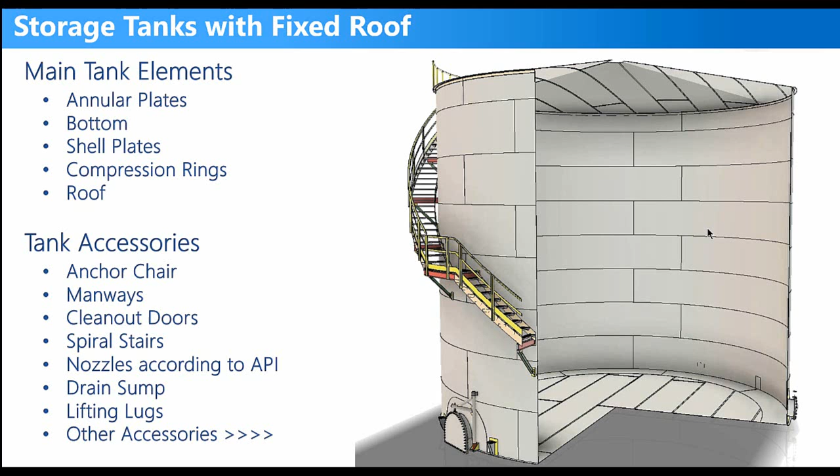Let's at the beginning discuss the elements that we have the ability to add in this model. Let us define it in two types. The first type is the main elements like annular plates, bottom plates, shell plates, compression ring and roof. Those are the main elements of the storage tank. The others shall be the accessories like the anchor chair, manways, clean out doors, spiral stairs, and we will discuss how we can add those elements in our model.

At the beginning, let's define the types of annular plates. We have three different types. The first type is annular plate with equal pieces. In this type, you have the ability to define the number of annular plates, and all of them will be identical - the same arc length, the same thickness, the same width, all dimensions shall be the same.

The second one is the annular plate from different pieces. Here you have the ability to define the arc length for each annular plate, but the thickness will be the same for all. The third type is annular plate from different pieces and thicknesses. In this type, you have the ability to make both the arc length and the thickness differ from one to another. So the main difference between the three types is the controlling of the arc length parameter and the thickness parameter.

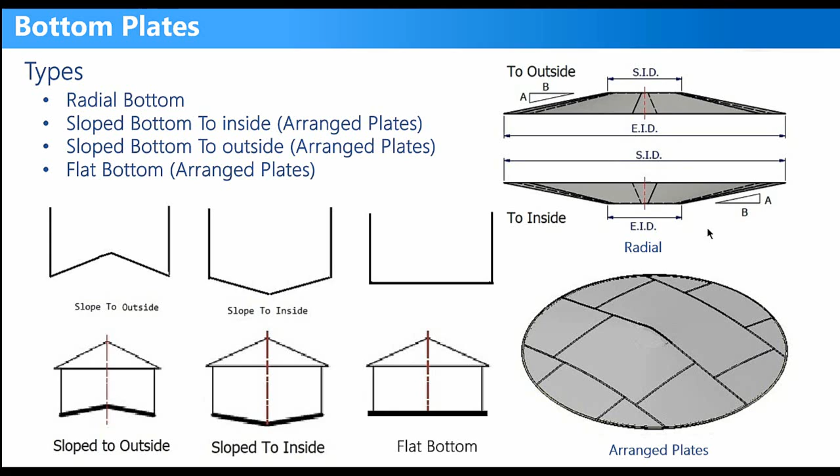The second main element is the bottom plate. We have in SEG software four different types of bottom plates. The first type is radial bottom - you can create radial plates to create the bottom plates. The second type is sloped bottom with arranged plates to inside or to outside. That is the third type. The last type is flat bottom with arranged plates, and for the last three types, you can use a new tool in SEG software to make the arrangement of plates of the bottom.

The shell plates - in shell plates we have in SEG software more than 10 different types, but actually we will use two types only in storage tanks. The first type is shell from different pieces, where the user will define the length of each plate. But in the beginning, SEG software will make all of them equal and will give you the ability to change the required piece length as user defined.

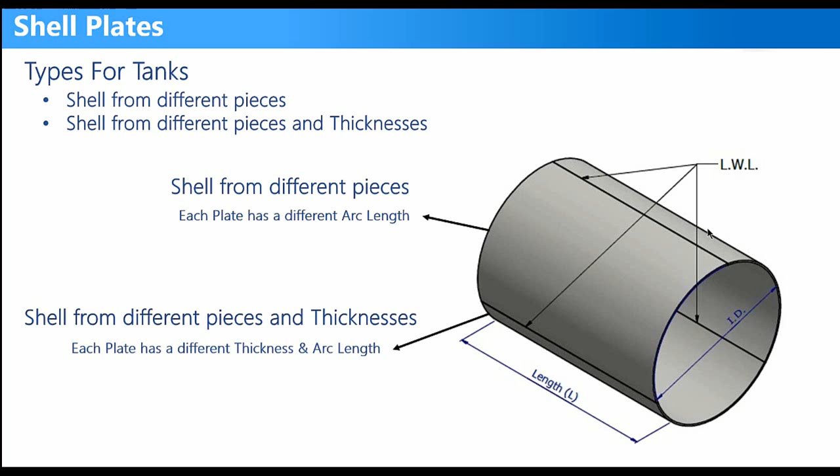The second type is shell from different pieces and thicknesses. In this option, the customer will have the ability to define the thickness of each plate and the same for the arc length for each plate on the shell course. We will discuss that in detail in our demo.

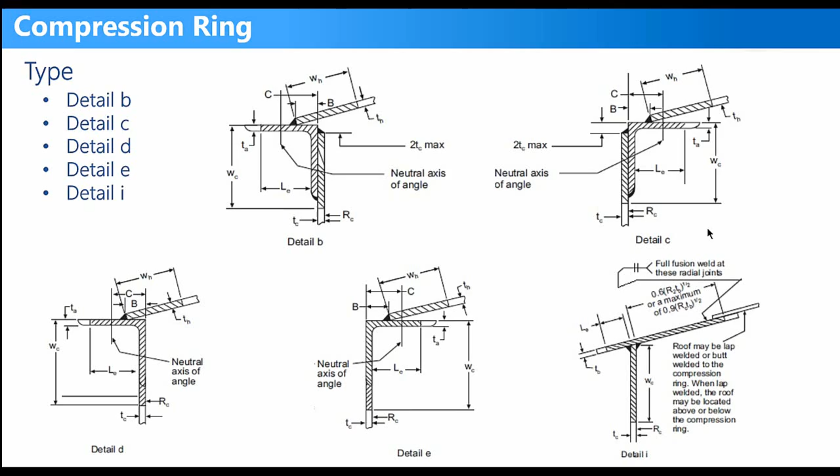Roof plates - we have three different types of roofs, all of them fixed. The first type is radial roof, where the plates will be radial to the center of the tank. The second type is arranged roof from plates, like the bottom. The third type is dome roof, and you can make this roof as a dome roof.

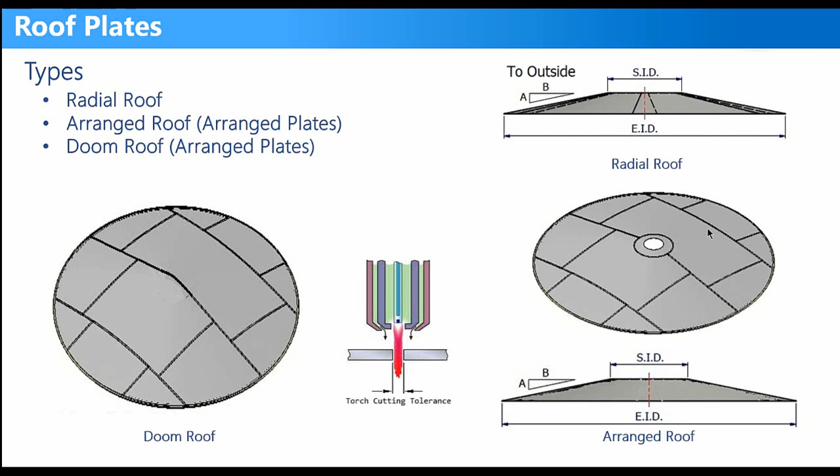Now we will discuss some accessories or attachments to the tank, like the anchor chair. In the anchor chair you can add a wear plate to the anchor chair, and you have the ability to remove it if you don't want it, or add it. Regarding the required number of anchor chairs, you can define the quantity of the anchor chairs to make them as a better arrangement.

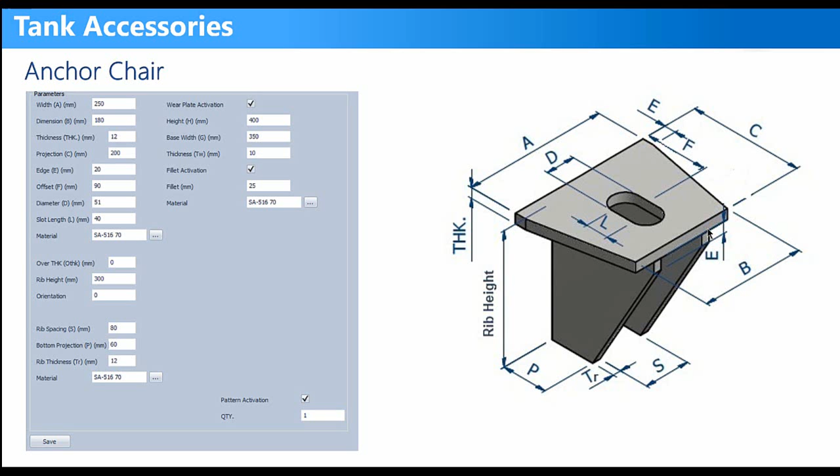And if you want to make them separate, defined differently from the others—for example, one has a wear plate, or one has a different shell thickness—you have the ability to define them separately, and you will not use the pattern option.

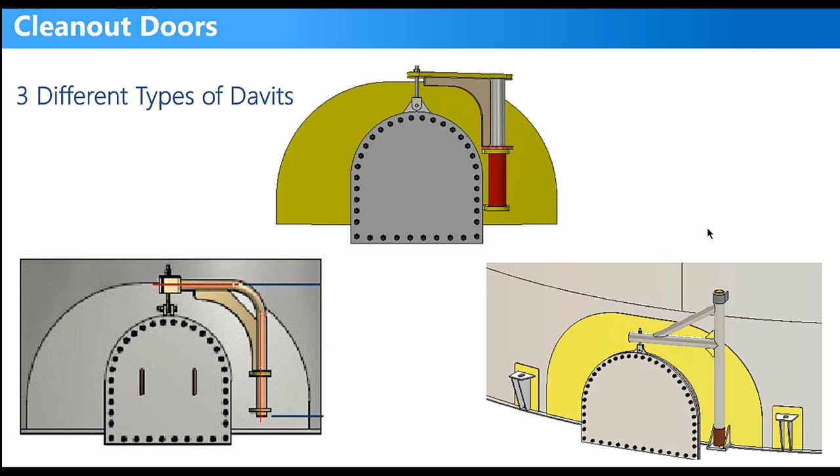Here for the spiral stairs, you have the ability to add a spiral stair to your storage tank, and you can add any number of levels of spiral stairs to your model.

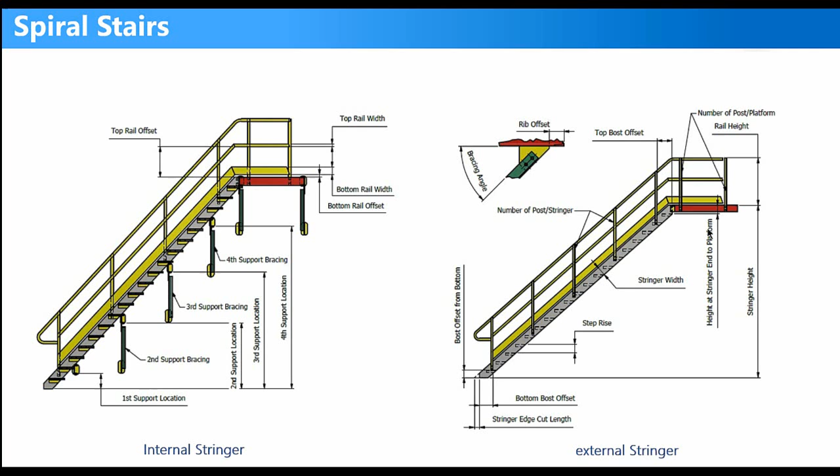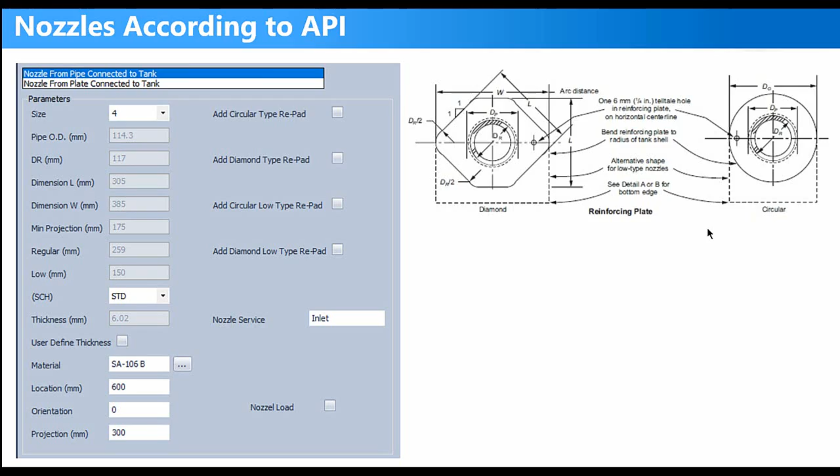For nozzles, you have 2 different types: API nozzles, according to the API requirements, and nozzles according to ASME requirements. You can change the shape or configuration of the re-pad according to API requirements—whether it's a circular or diamond re-pad, circular low type or diamond low type—so you have the ability to change this. In SEG software, there's a tool for plate arrangement.

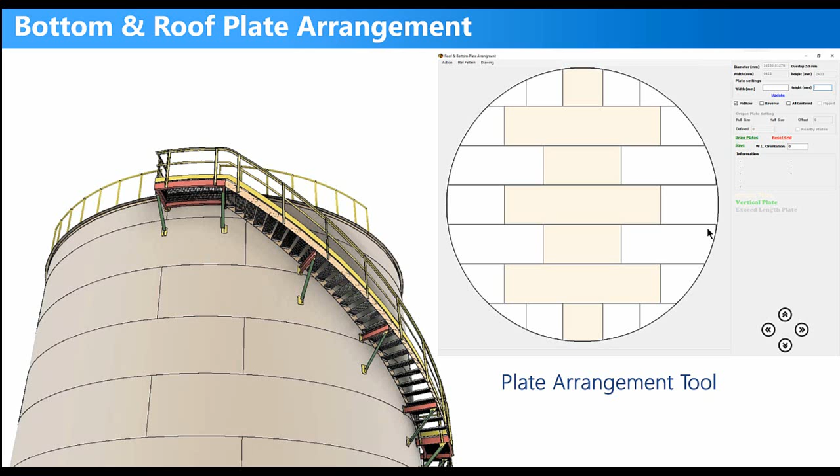We will discuss it in detail in our model during our presentation, inshallah, and show the options available in this module. Finally, we will make some nesting studies during our presentation.

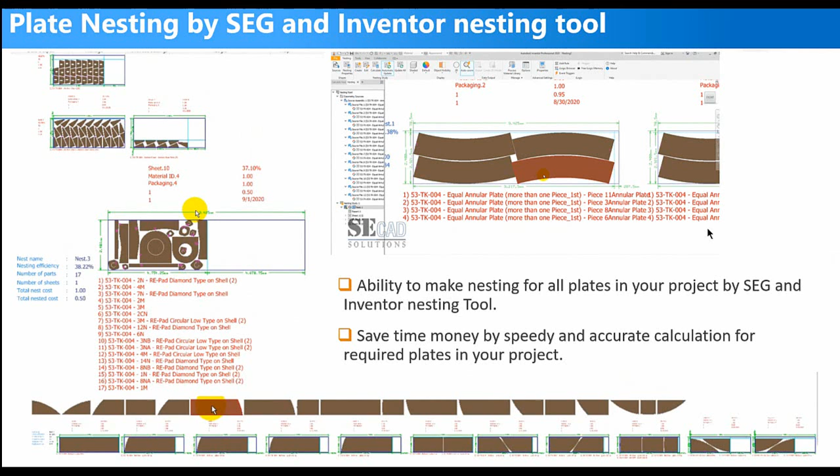Okay, now let's start our model. From here we will open SEG software. After opening SEG software, from the new tab we will define our project name.

And select the location on the hard drive, and from here we will select tank module and click finish. From the tree here we will select the equipment and rename it TT-100.

After selecting it again, from setting we will select equipment setting, and you can see that the position is changed automatically to be vertical and bottom to top. That depends on the type of the project—it's a storage tank, so those values shall be changed automatically.

Here we will define the delivered plate dimensions, and those shall be used in the calculation of the plate arrangement for roof, bottom, and shell plates.

So let's define the required or delivered plate dimensions, and from here the surface and the serial number, and you can define the material from here.

Okay, from app setting we will make a preview for the parent and the child, and the sort numbering to make it sort numbering, and click save.

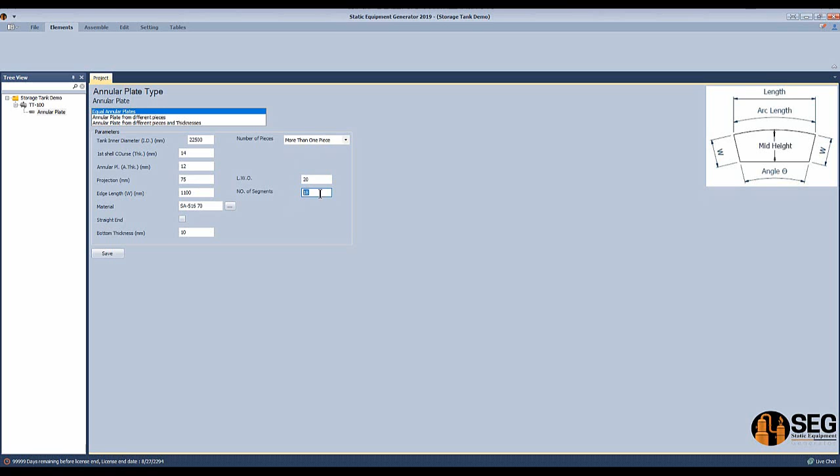And the projection 75, and the edge, let's make it 1100, and here the bottom thickness, let's make it 10 millimeters, and the longitudinal building line orientation, let's make it 20, and the number of required annular plates 18, and click save.

Now we will click assembly to start the assembly. Let's come back to Autodesk Inventor.

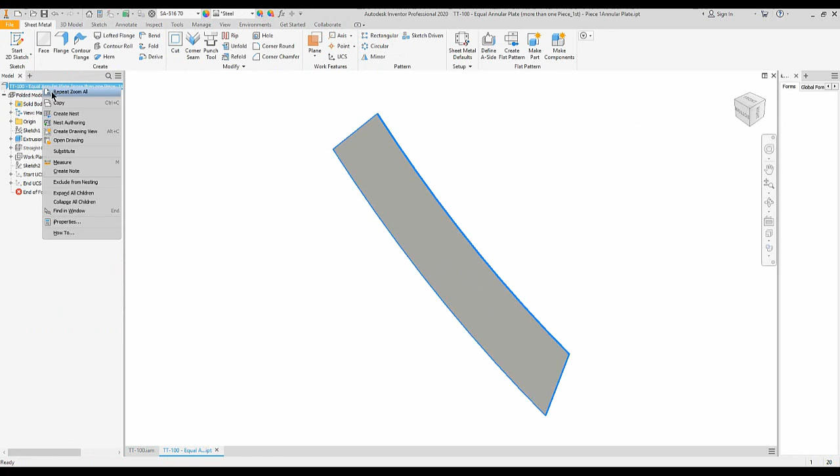Okay, now we will make a nesting for those plates. Let's select one of them because they are equal, and let's make a nesting for it. So we will create a nesting study, and from here we will select standard nesting.

Detecting the material and thickness of this item. After importing, we will click OK, and from process here, if we select this one, you have the ability to define the length and width of the plate to be delivered.

And from nesting, we will create a new nesting here, and from here we will define the required number of this plate and update this nesting again.

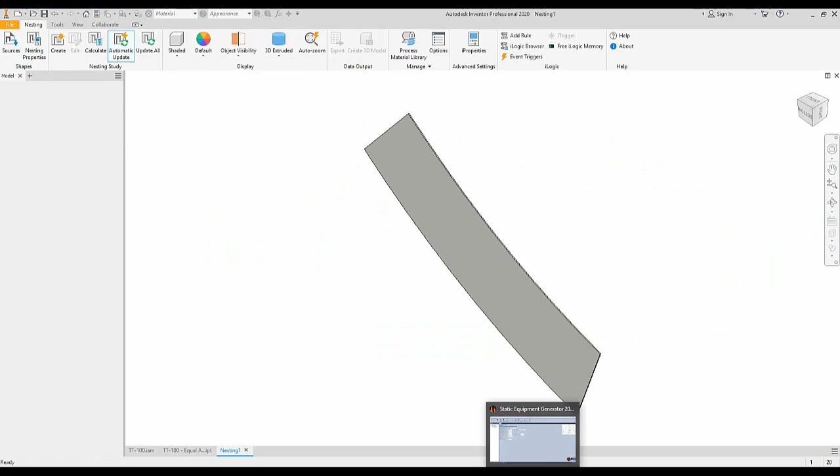Let's make a small modification and check what will happen, what will be changed on the model. Let's make the length 1 meter, and the required number 16, and click save, and let's click start and check the model again.

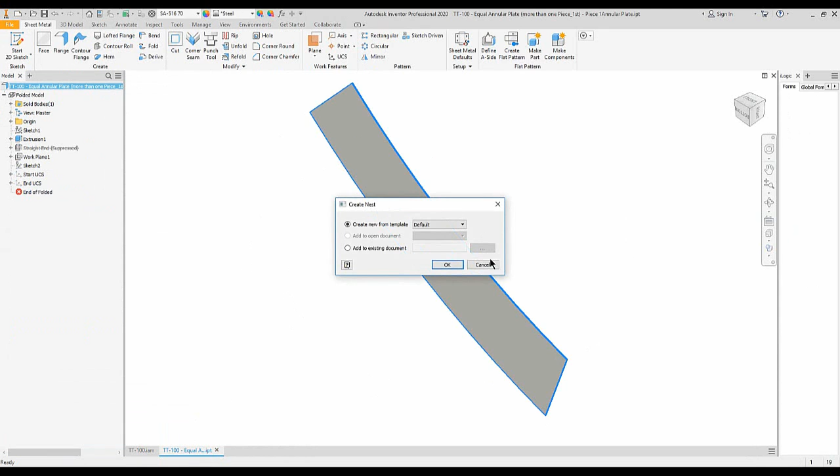Okay, here we will make a nesting for this plate and repeat this process again. Click yes, and after the extracting process, we will click OK. From here you can check the dimensions of the nesting plates, and let's create a new nesting. From nesting, right here we will define the required number, which is 16, and click OK.

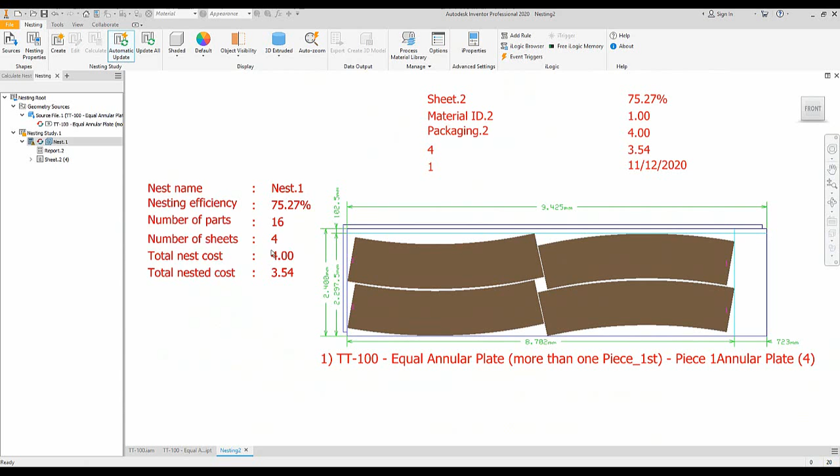Right here you can figure that we will need 4 sheets only after this modification, and the efficiency is increased to 75%.

Okay, now let's add the bottom plates. Now we will come back here and add the bottom plates, and from elements we will select the equipment, and from here we will select a arranged sloped bottom. Click enter, and from here we will select the type of the bottom, sloped to inside or outside.

Okay, and from here we will define the bottom thickness, the overlap, and the inside diameter of the tank, or the outside diameter of the bottom, the material of the bottom, the slope, and the cut tolerance. And from here we will click save and open this model.

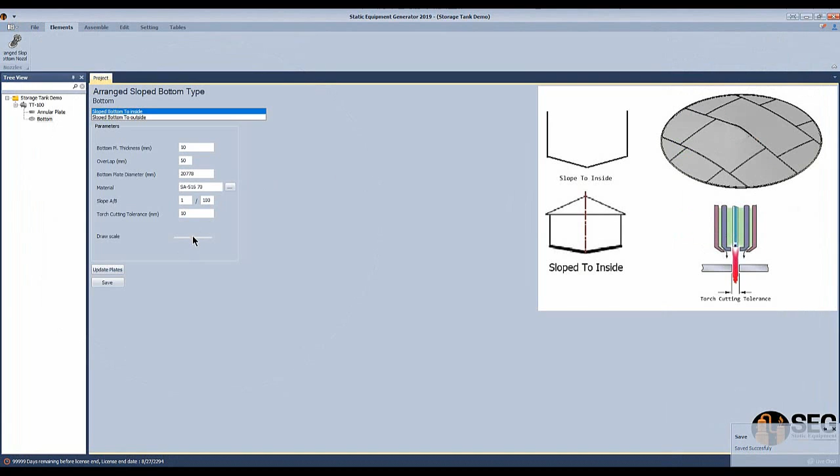This slider is controlling the size of this circle right here. So if you make it like this, it will be small. If you make it like this, for example, and update, it will be like that.

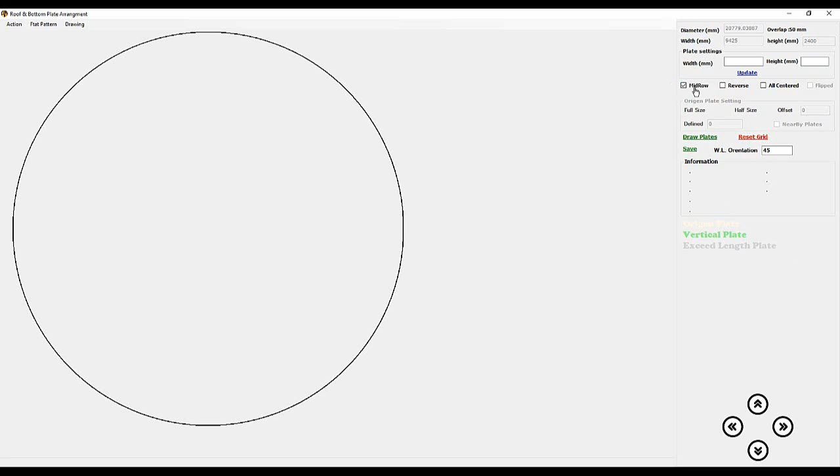Now we will make some studies, and we have some options to make the plate arrangement. So from here, let's select mid row and click draw plates, and by selecting this checkbox you have the ability to add a mid row right here.

But if you take a look, we have small pieces right here and we don't need it. So let's check another option, which is make all of them centered, and click draw, and you can figure that this is better than the other one.

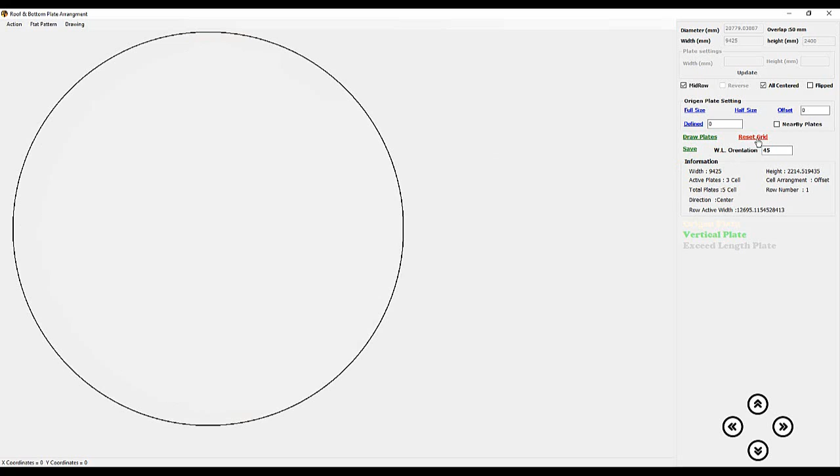And let's select the reset grid and make a reverse and select draw, and you can figure that we have small pieces right here. So let's make it mid row and all centered, and click draw plates, and this option is better.

Now let's change the orientation of the welding lines here and click save. Now we will go to the assembly and click start assembly.

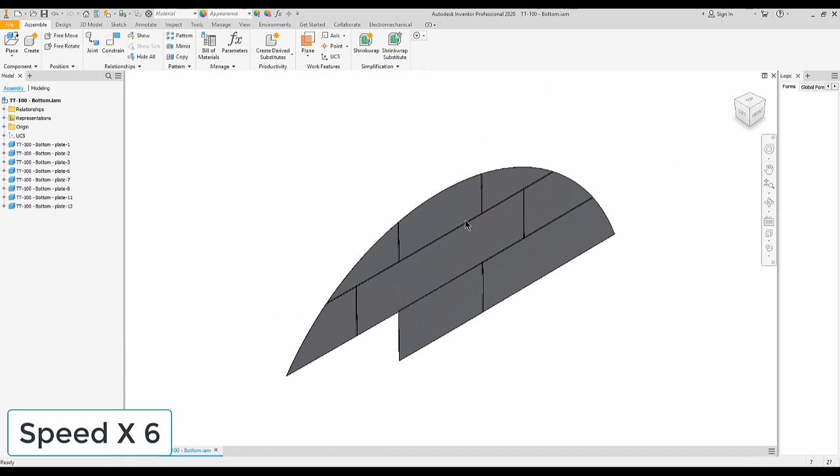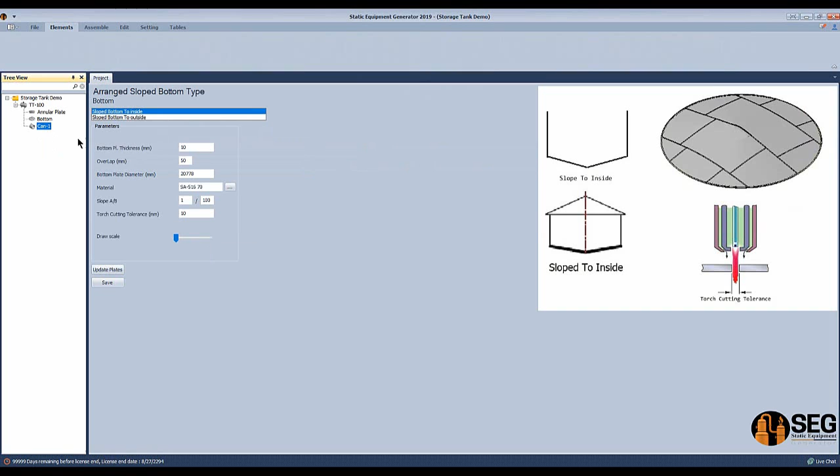Now let's add a shell course. From here we will select the vessel or the equipment, and let's add a shell can 1, and in this type we will select the shell from different pieces and thicknesses.

Why do we select this type? Because we have a clean out door, and this clean out door will be on a different shell course with a different thickness. So let's select OK and define the inside diameter of the tank, the height,

the main shell plate course, and the number of plates, and let's click update. And now we will define the thickness for each plate.

Okay, and let's take a look at the last plate with a negative value, and the save button is not active. Here we will define the first plate width or length with 4 meters, and the fifth plate with 6 meter length, and click update.

Now if you take a look at the last plate length, it's around 4 meters 0.1. And from here, if we change the start angle of the first plate, you can figure that the mid angle of the first plate is 10 degrees and the end angle is 20 degrees.

So we will make the middle of the first plate at 0 degrees. So we will make this value a negative value, 0.1916, and click update. Now you can figure that the mid angle of the first plate will be at 0 degrees.

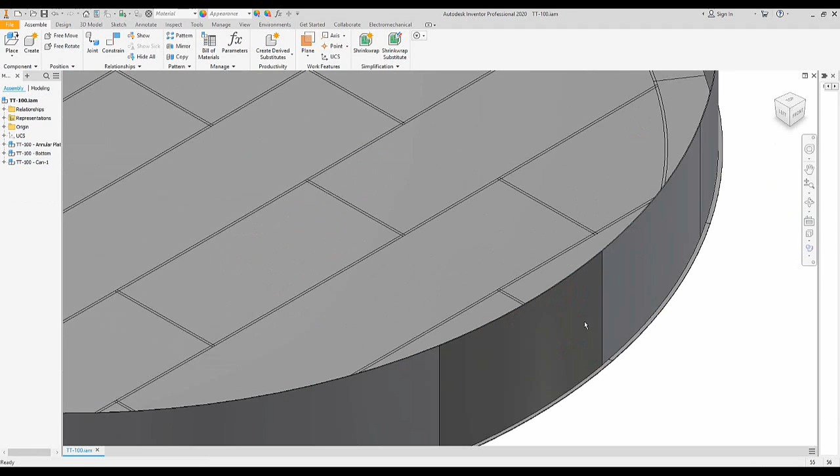After finishing the assembly, you can figure that this plate has a different thickness. If we get the measure tool and measure the length of this plate, it's 10 millimeters, and for that one it's 14, and you can figure that the color of this plate is different from the others.

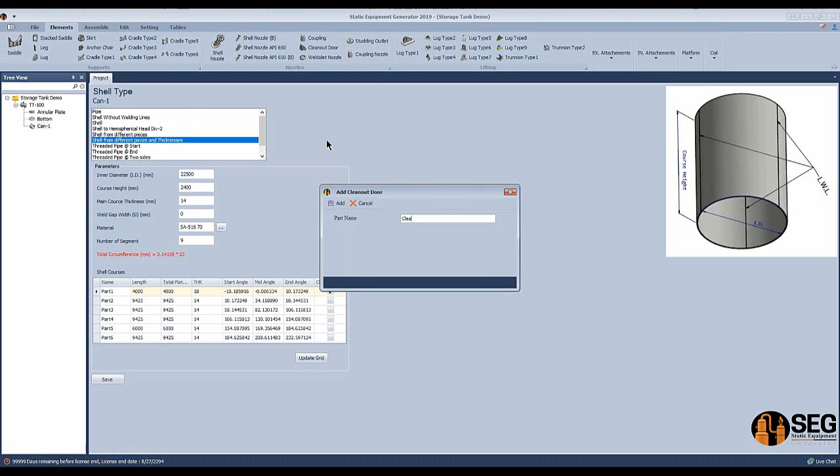Let's add a clean out door to this one, and from here, from elements, let's select clean out and click add.

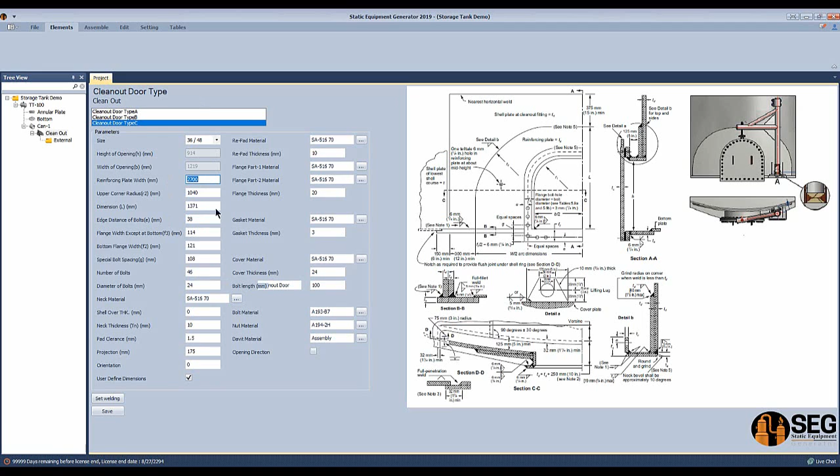From here we will select the type of the davit. Let's select this type, select the size, and if you wanted to make a modification to the API standard dimensions, just select user defined and you will have the ability to define those parameters. From here you will define the thickness of the flange, the thickness of the gasket, and the opening direction.

Let's click save, and from here we will define the set weld and click save. Now let's click start assembly.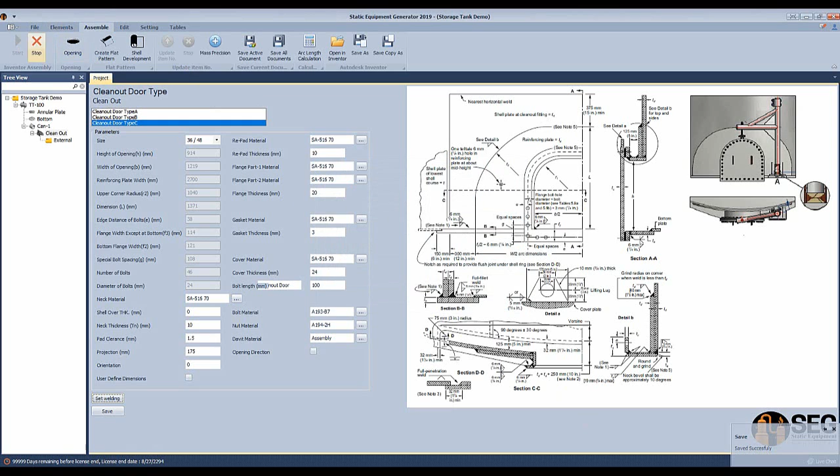Okay, now we have the clean out door of the tank. Okay, like that. And now we will add the anchor chairs, and from here, from elements, we will add the anchor chair. And from here we will define the anchor chair dimension. If you wanted to add a wear plate, just select this checkbox and define the wear plate dimensions.

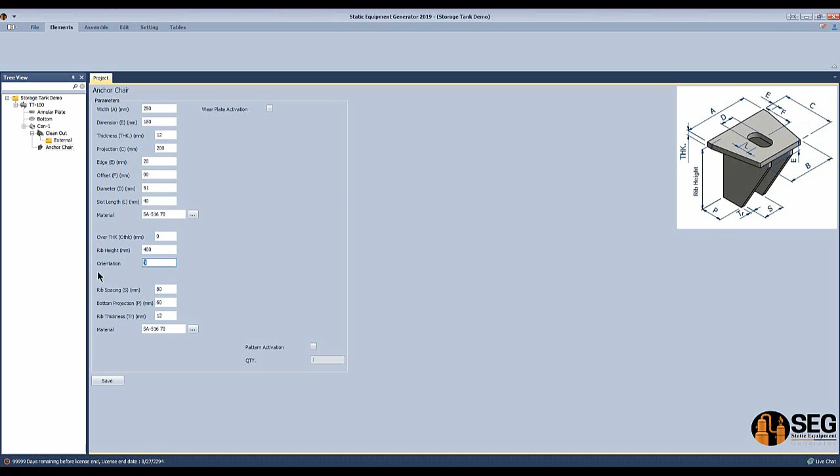And let's change the rib height. Okay, let's change the rib height, and let's make the orientation to 15 degrees, and we will need 12 pieces, and click start. Okay, now we have those anchor chairs around the tank.

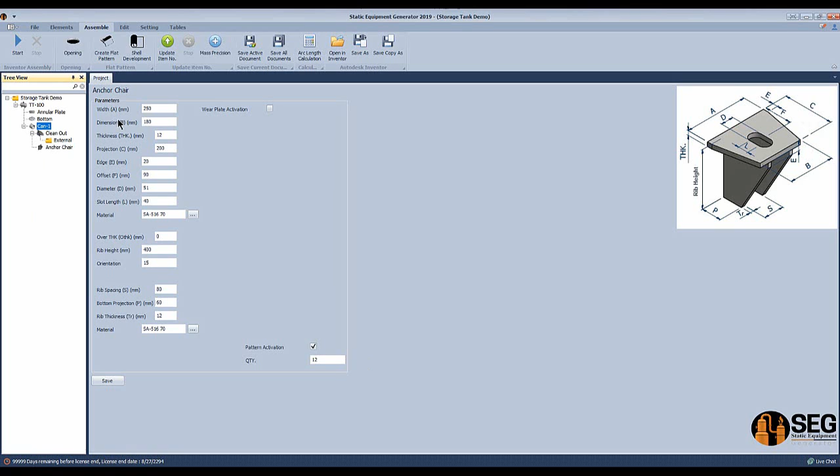Like this. Now we will add a nozzle, so from here we'll select the can 1, and from here select a nozzle according to the API, and let's name it as M1. From here we will select it as a nozzle from plate. Let's make it 24 inch, and the thickness was 14 millimeters.

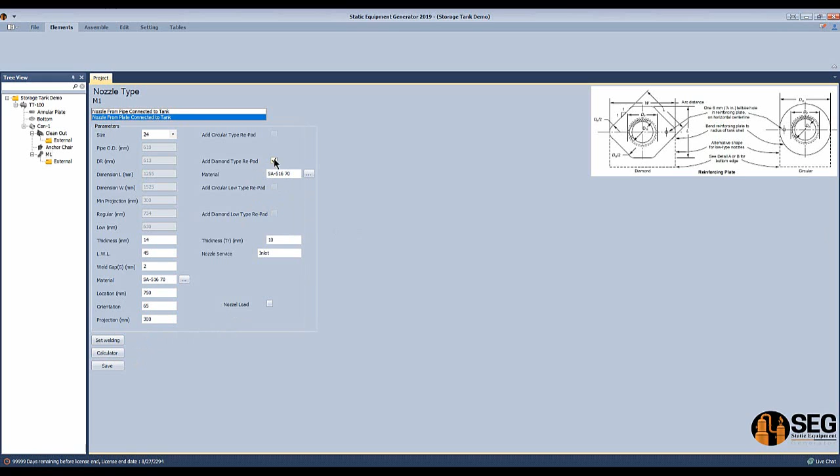The longitudinal building line, location 750, the orientation on 65, the projection let's define it by the calculator, and from here let's make it as a diamond plate, and the thickness of this one as 14 millimeter, and let's click save.

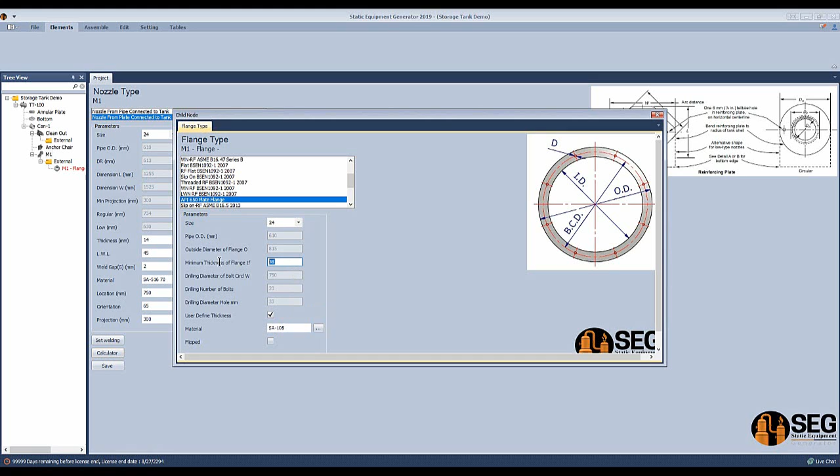From the calculator right here we will open this form and let's insert a flange, and from here we will add a flange according to the API. It's 24 inches, and from here we will define the thickness of this one, and let's make it 20 millimeters, and let's click save.

Now after closing this, we try to define the projection from the vessel center line, and let's click calculate. Now that's the projection of the pipe outside the shell, okay, which is that value. Now we could increase it a little bit and click OK and click save.

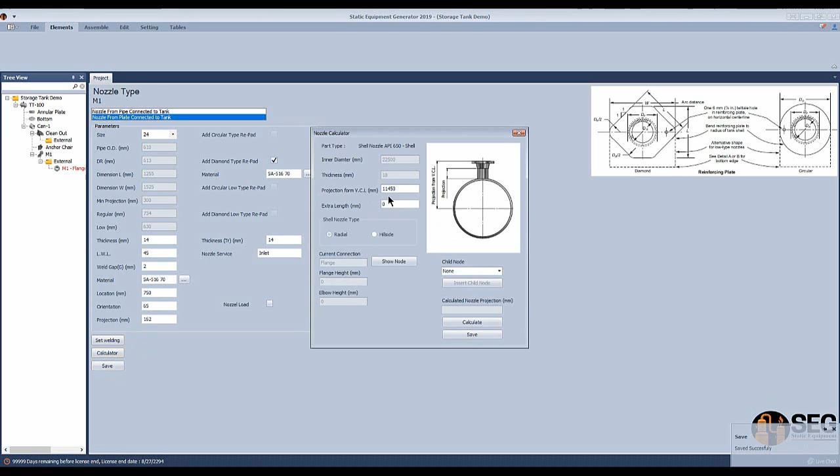Now you can figure that that's the projection of the nozzle from the facing of the flange to the center of the tank. And let's click save, and from here let's rename this flange because it takes a random name, and click enter.

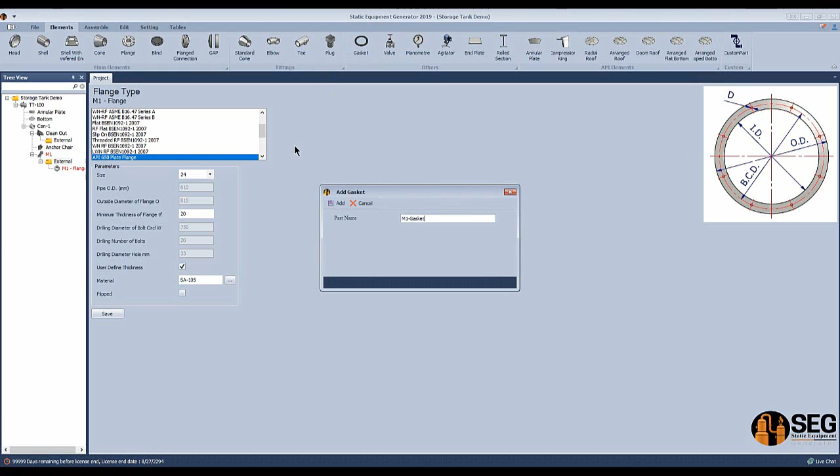Now we will add a gasket, so let's select the external connection and click here M1 gasket, click add, and from here we will select the API gasket, select the size and define the gasket thickness and the material. Now we will add a blind, M1 blind, and click save.

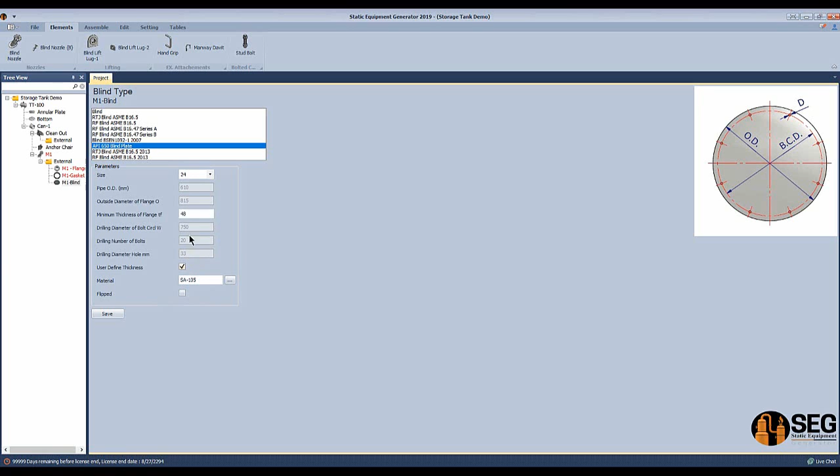From here we will select the API, select the size, and if you wanted to define the thickness manually, let's make it 20 and make this blind as flipped flange. And now let's add M1 grip or hand grip. So from here we will define the length to be 200, and let's add 2 hand grips.

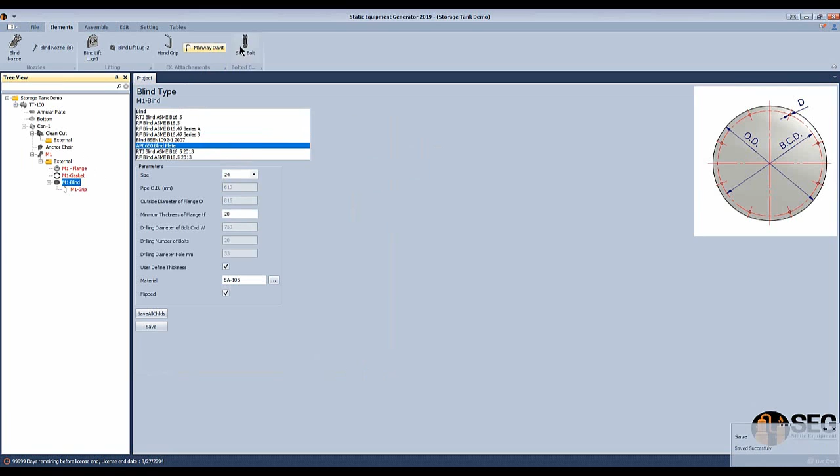And from here let's add M1 stud, and from here we will select it to be 24 millimeters, and the length will be 20 plus 20, and the length of the bolt.

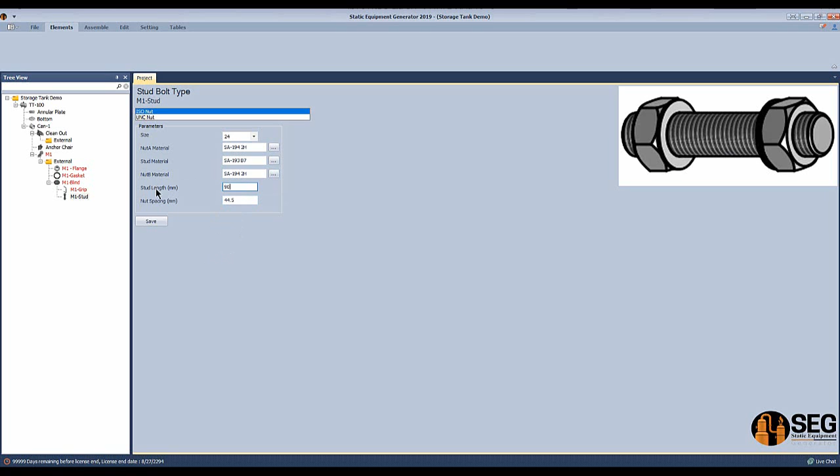And from here we will add a manway, M1 davit for the manway, and let's click add, and from here select the suitable type for your manway, and let's click start assembly.

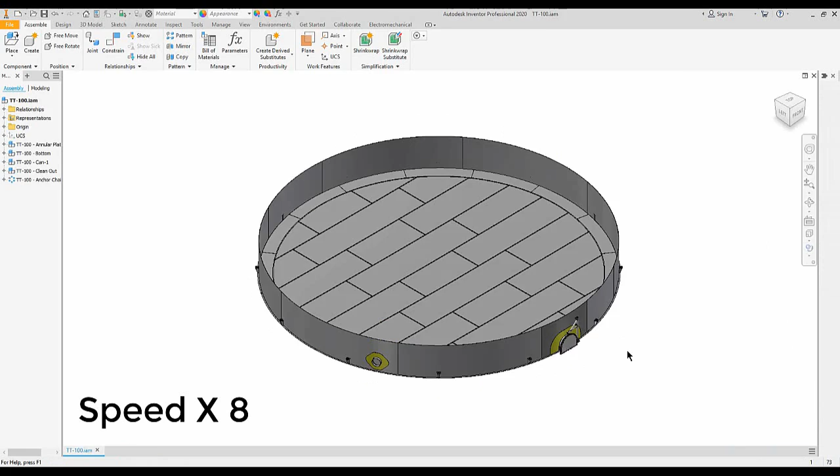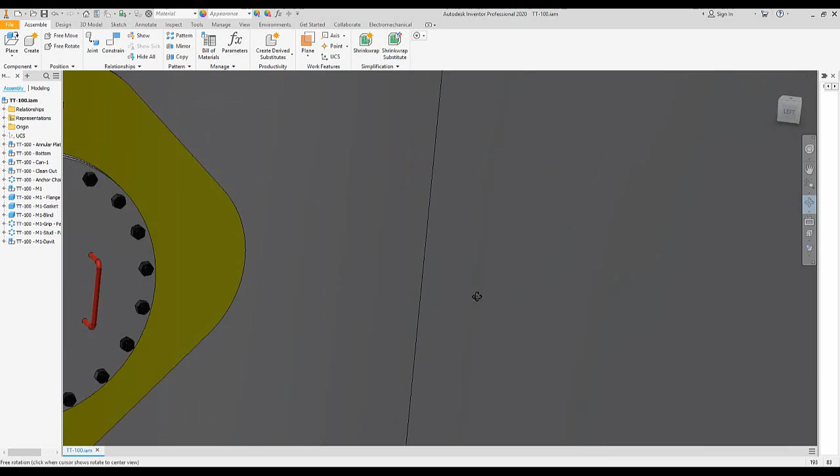Now the manway is done, and you can figure that those are the stud bolts and the hand grip and the clean out door davit or the manway davit, and you have the ability to change the opening orientation direction by changing this check. Now we will add another shell course to this tank, and from elements we will add a can 2.

But this type of can we will make it as a shell from different pieces only, not different pieces and thicknesses. So from here we will select this type and define the inside diameter, the course height, the thickness, the gap, and the required number of elements, the length of the first piece, and the start angle, and let's click update grid, and you can figure that the last piece is calculated automatically according to the above formation.

And from here let's add another can 3. Okay, let's make it look like can 2, but we will change the thickness and the orientation. From here we will change the thickness to be 10 millimeters, and let's make the start angle to be 15 degrees, and let's click update and click save.

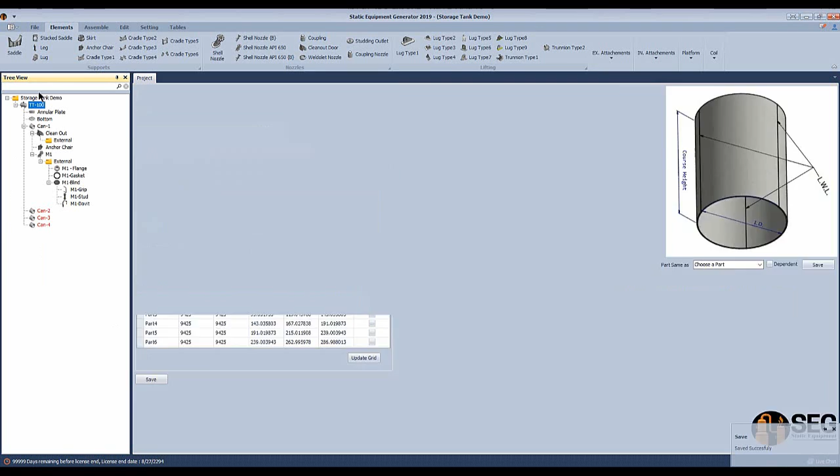Now we will add another can 4. Let's make it look like can 2 but with a different thickness. Let's make it 8 millimeters. Click update, and another can 5, and let's make it look like can 3 but with a different thickness, and let's click save, but we need to update first, and click save.

Now we will add a compression ring. So from here we will add a compression ring, and for this one we will select the suitable type of the compression ring, and let's define the inside diameter, which is the shell outside diameter at the last course, and that's the offset, the size of the angle, and let's click save.

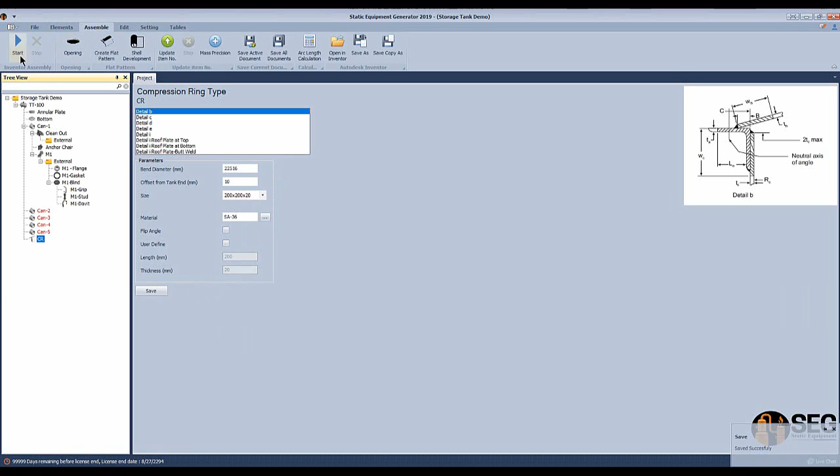And let's add the roof here. So we will add a hinged roof, and let's click add.

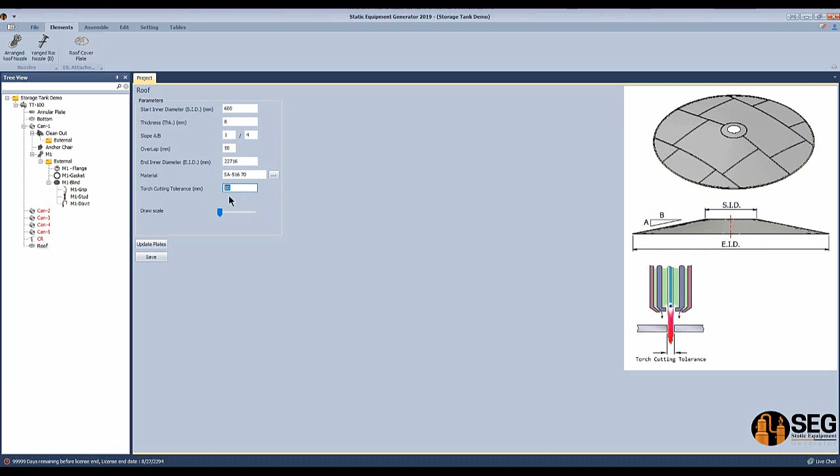Define the inside diameter of the roof, the thickness, and the roof slope 1/4, the overlap, and the inside diameter, or the diameter of the tank over the angle or the compression ring. Okay, and that's the thickness, the torch cut tolerance. Let's click save and open this one.

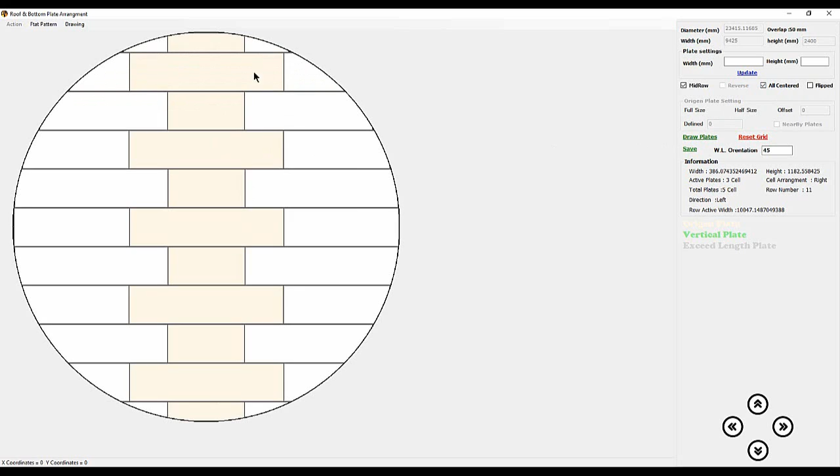From here let's select the initial condition as a mid-row, and let's check this option. Here we have very small pieces at the ends, but at the middle it's okay. Let's try this one. Yes, it's better. So we can use this, but let's make this row as a vertical and that one as a vertical, and let's merge those two rows.

So from here we will make merge vertical rows, and from here let's select the origin plate and define the width of this one to be the delivered plate dimension, and let's split those plates like this and define the width for those plates to be the maximum width of the delivered plate dimension.

Here let's repeat those again at the bottom here. So from here let's make it vertical orientation by the row, and from here vertical orientation. Okay, now we need to merge those, so let's select the above one and select merge vertical rows. Now they are vertical, so you have the ability to make this at the left.

For example, if we wanted to make it at right like this, it's an option, so let's make it like this, but you can figure that the height of this plate is 3.5 meters. So we need to split it, for example, split to right. Okay, and let's define this like this, and for this one you can figure that the welding line here is not okay, it's too near to this one, so we have the ability to make it offset if we need to.

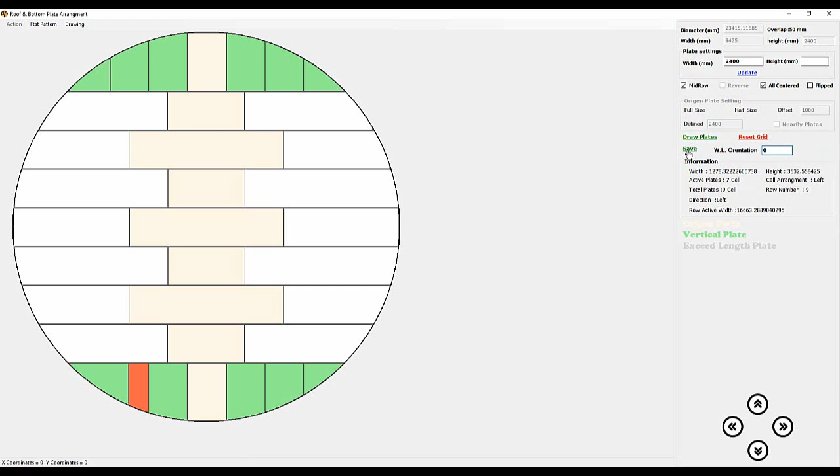Okay, now we will change the longitudinal welding line orientation to make it 0 degrees and save this one. Okay, let's update this again. Okay, and let's start creating the model. Click start to start creating the shells and compression ring and roof.

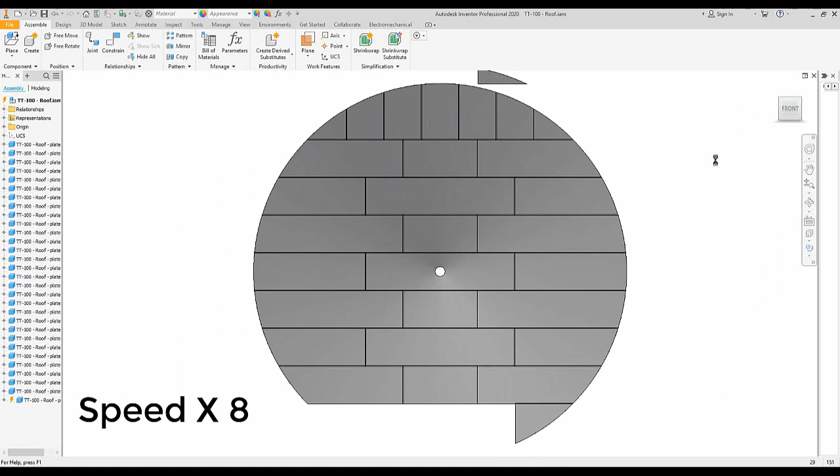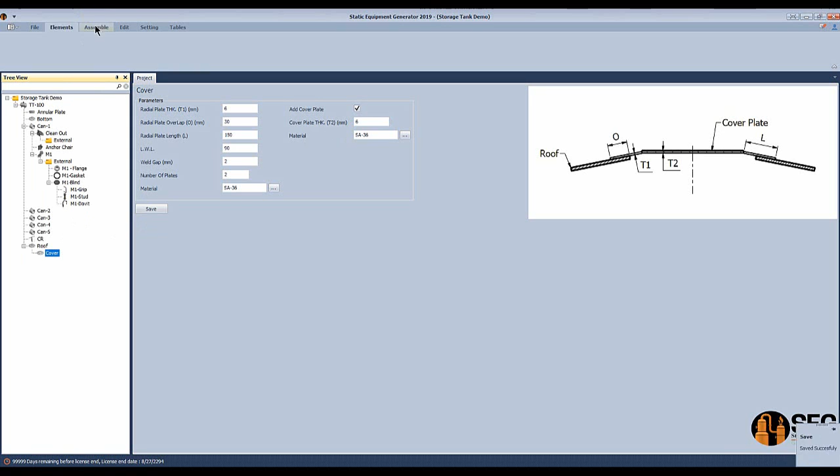The longitudinal welding line orientation, let's make it 90 degrees. Let's make it from 2 pieces, and let's add a cover of 6 mm and click save and start. Now we have this cover. Now let's add a spiral stair to this tank.

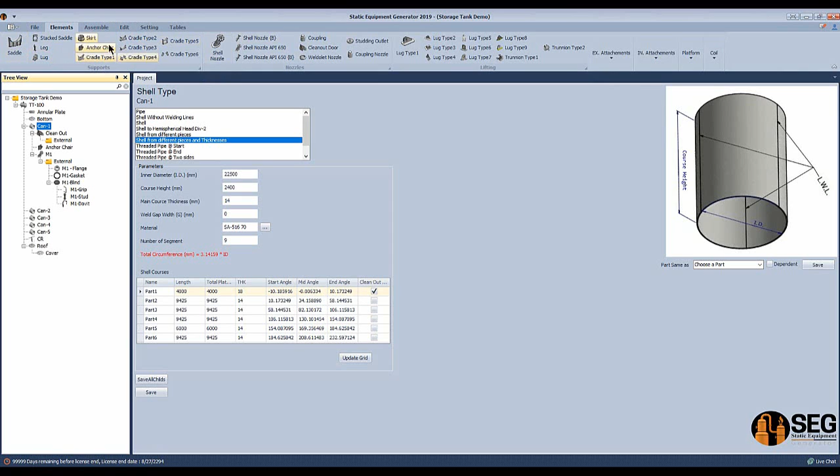So let's go back to SEG, and from here we will select the first can, and from elements we will add a spiral stair from external attachments, and you can see how many elements you can add to your model, like supports, nozzles, cleanout doors, weldolet, stud outlet coupling, and the lifting lugs, the external connections like nameplate, supports, grounding, fireproofing, pipe support, all of that. From here we will add a spiral stair.

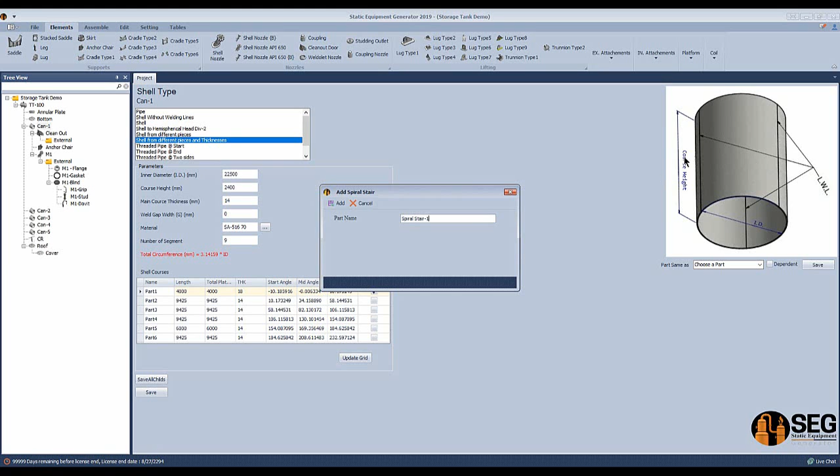And click add, and from here we will select a spiral stair from the tree, and let's define the dimensions of this spiral stair. That's the stair height without the platform grating, so it's from the stringer bottom to the stringer top point, so that's the straight height. So let's define it like that.

Stringer width, the contact angle, let's make it 25, and the orientation will start from 25. Stair height at the end, which is that end right here. Okay, the cut at the beginning, the base from bottom, the width, and the direction, clockwise or counterclockwise. That's the thickness of the grating.

So if you add this value plus that value, it will give you the stair height from the top of grating. Okay, platform angle, let's make it 5 degrees, and to calculate this we have a tool here, the arc calculator.

So if we are inside the shell, inside diameter or outside diameter, for example, and if we wanted to know, if we have an arc length of 1 meter, what is the angle included in this one. And if you delete this, for example, and if you would like to make the angle like this, and that's the arc length.

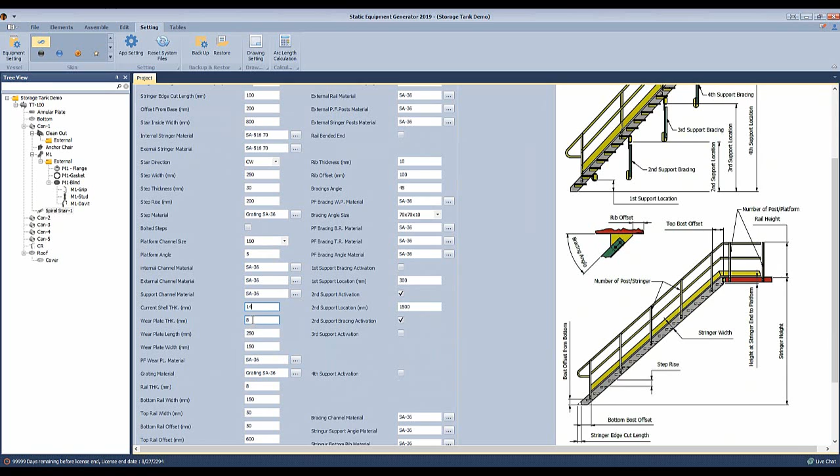Okay, so let's come back here and change the shell course thickness to 14 and the wear plate thickness. Okay, those options, let's leave them, and from here we will make a rail cut to the first post. Okay, here those are a cut on the bottom and mid plates, so we'll make a cut to the end of this angle, and this spiral stair is not connected to another platform at the beginning. Okay, so it's the first one, so it's not connected to another one at the beginning.

And let's make the extension of the grating of the platform with half a degree from here, and let's leave those values like this. The number of posts per stringer inside and outside, and let's make the bended rail at the end, which is this bend. Okay, and those values let's leave them as they are, and from here let's add the bracing supports, and let's define this.

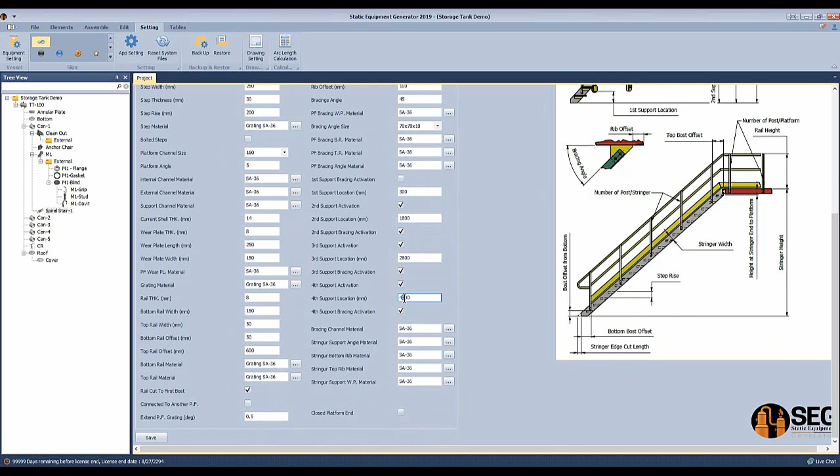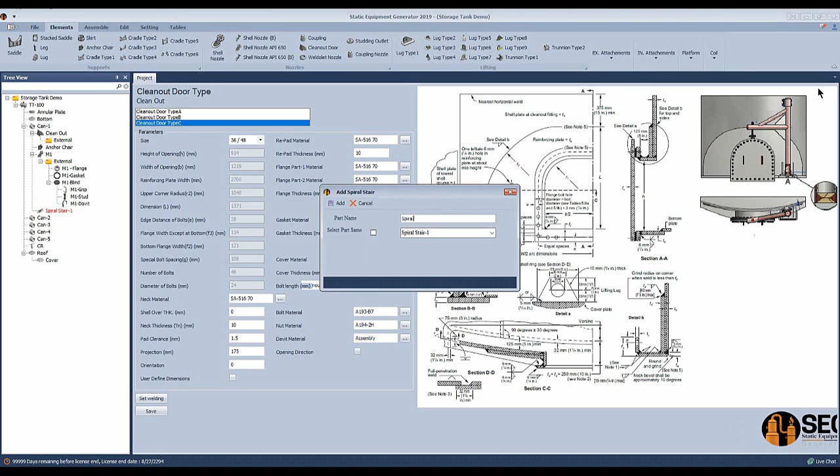Like this, and this option for the closed end for the platform, it's not a closed end because we have another spiral stair. Let's click save, and from here let's add another spiral stair, and let's make it the same dimension as spiral stair 1, but we will make some changes, like changing the start angle orientation for this one. Here the orientation starts from 25, so it will be plus that one and the platform. So this one will be 55.

Okay, and if we come back here, it's not cut at the end, and this one is not a radial end, and we will make this platform closed at the end. Okay, so those are the changes right here. And regarding the extension at the end, let's make it 0 again, and it's connected to another platform, so we will select this checkbox. And regarding the thickness, it will be 10 millimeters. Okay, and let's increase the clearance by this value.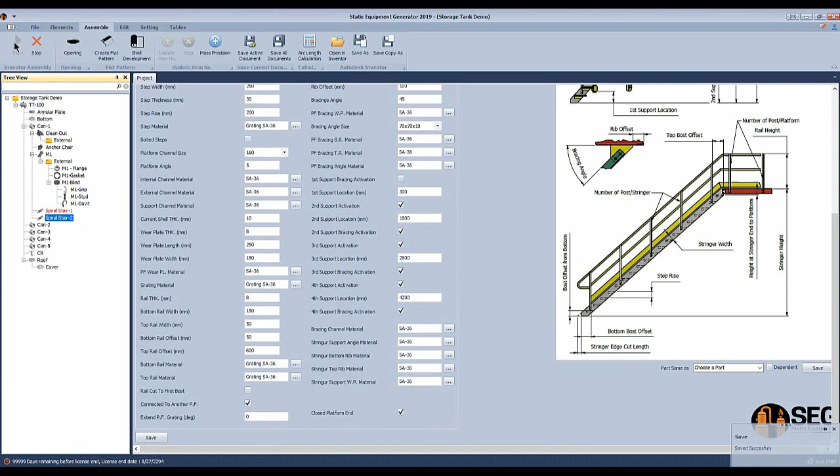Okay, the difference between 14 and 10 is 4 millimeters. So let's make it like this. That's the clearance, and let's click save. And now let's click start assembly to start creating the 3D model of the spiral stairs.

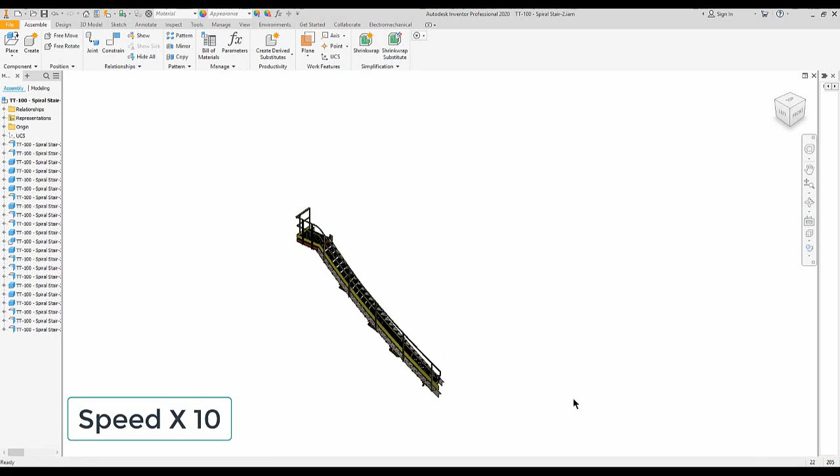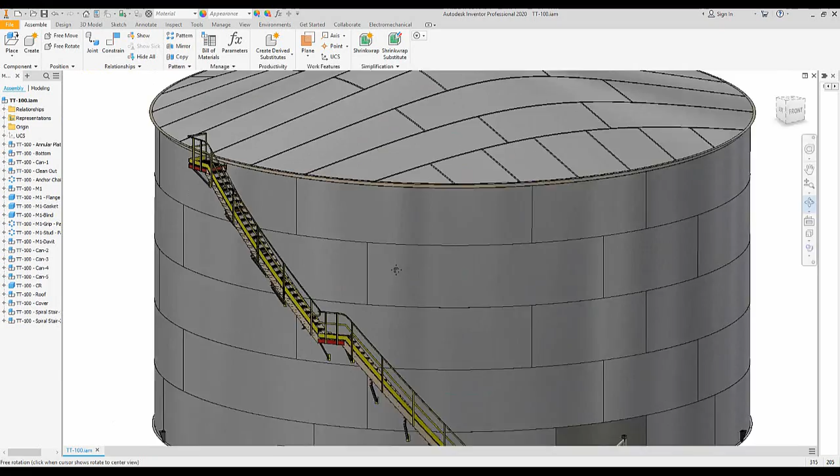Now the spiral stair is ready, and you can check if you have any clashes. If we take a look here, this support makes a clash with this step, so we need to move it a little bit down or over. The same for this one. And if we take a look right here, the welding lines, no clashes with the welding lines. So if you would like to make any modification, you will come back again to the spiral stair here and modify the options. Now let's add some nozzles to the roof.

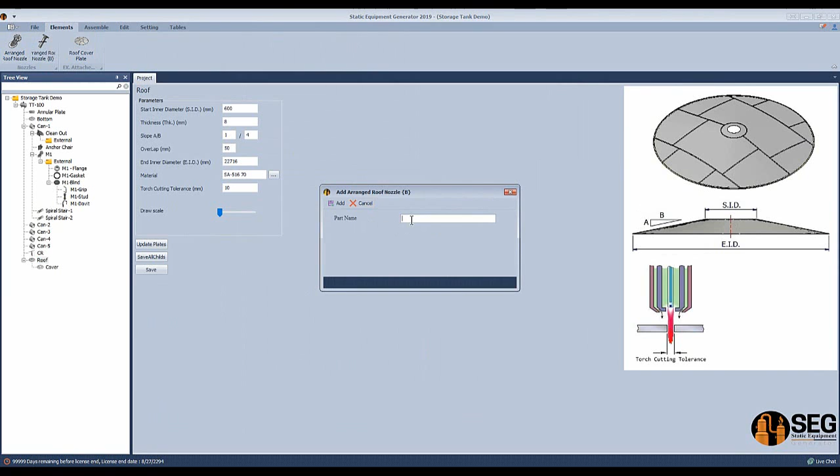From here, let's add a nozzle with an internal dip pipe. So from here, let's add a nozzle N1. And for N1, you can make it from pipe or from plate. Let's make it a nozzle from pipe, 8 inches with a repad, and let's define the repad width and thickness. The standard schedule. Okay, the offset from the vessel center line, let's make it like this,

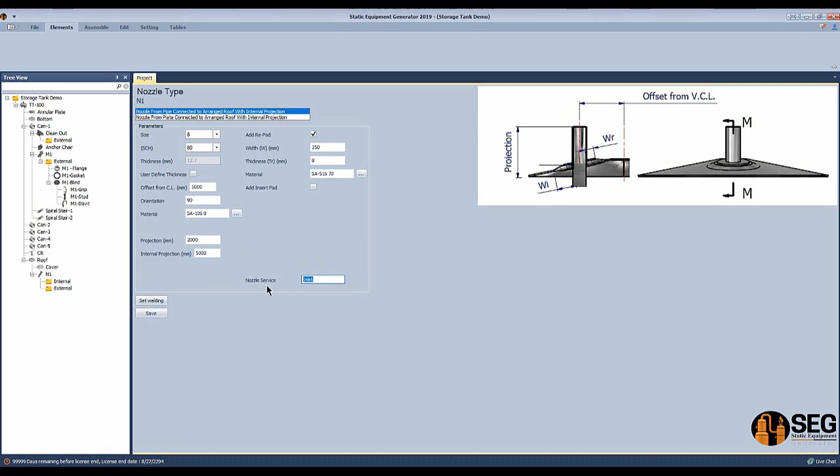and the orientation will be at 90 degrees, and the projection from the outside, this projection, let's make it 2 meters for example, and the internal projection is 5 meters, and this one is a temperature indicator for example. And let's click save, and let's define the welding styles. And for the external connection, we will add a flange. So from here we will add N1 flange,

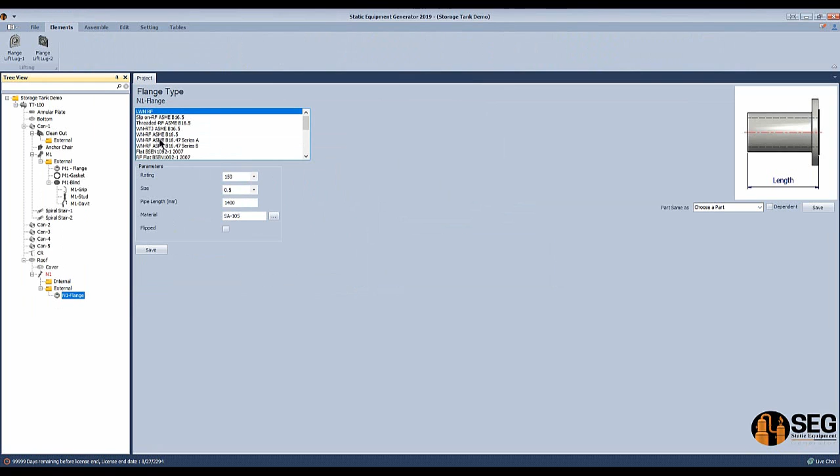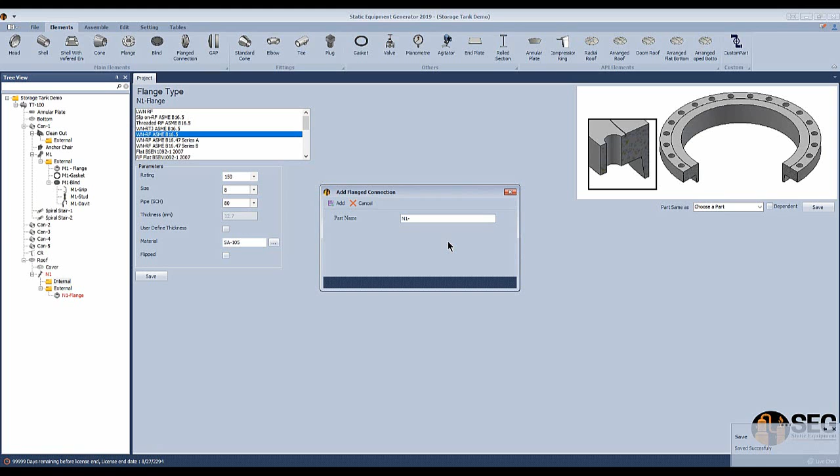and this one will be an ASME flange, weld neck, raised face, and the rating, and the schedule for this one, and click save. And for the internal, we will make a connection N1. And in this connection, we will make it slip-on flanges, 8 inches, and let's make this one like this. And if you would like to add bolts to this one, we can do it.

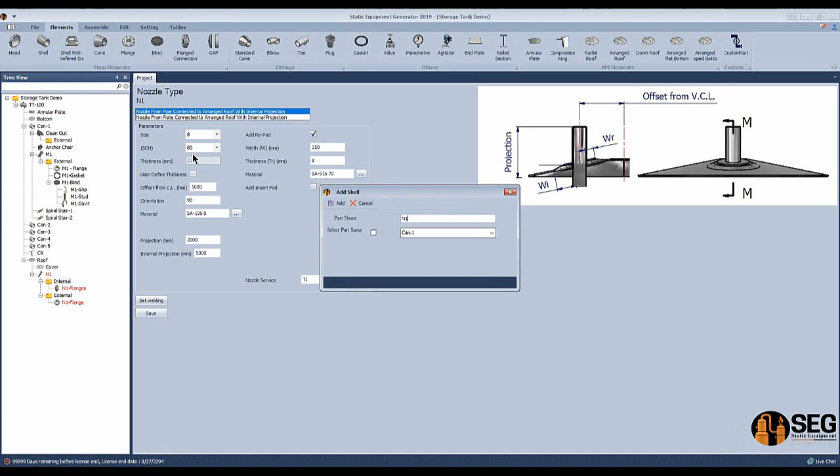Let's add another pipe to this external connection, N1 P1. Okay, and let's make this pipe 8 inches, the same schedule, and the length, let's make it 5 meters for example, and click save, and let's click start assembly.

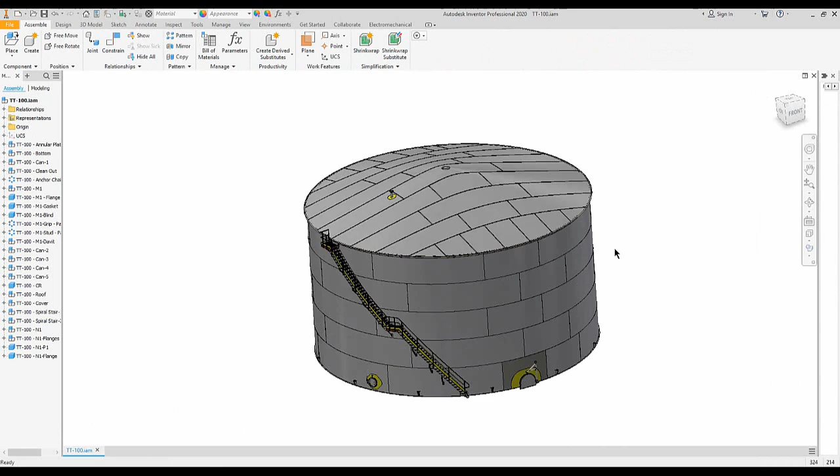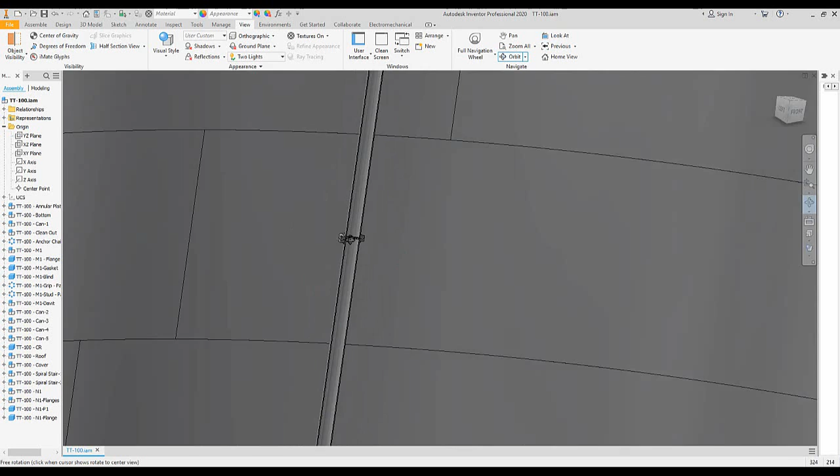Here, after adding this nozzle, let's take a section of the model. Sorry, from here, let's make a half section like this, and you can see that's the internal projection of the pipe, and that's the dip pipe with connected slip-on flanges. And that way, you can add other attachments to this model. Okay, here, part 1.